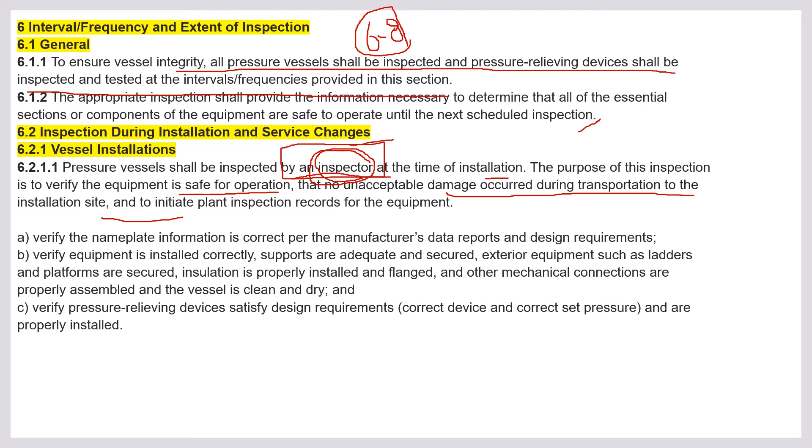The purpose of this inspection is to verify the equipment is safe for operation, that no unacceptable damage occurred during transportation to the installation site, and to initiate the inspection record for the equipment. What else? Verify the nameplate information is correct. Nameplate describes how much pressure, when it was manufactured, what is the code requirement, everything. As per the manufacturer data report and design requirements.

Verify equipment is installed correctly, supports are adequate and secured. Exterior equipment such as ladders and platforms are secured. When I say secured, means it is properly bolted, properly attached. Insulation is properly installed, and other mechanical connections are properly assembled and the vessel is clean and dry. There is no foreign material inside. Verify the PRD satisfies design requirements. Whatever the design requirement is, the PRD was installed accordingly.

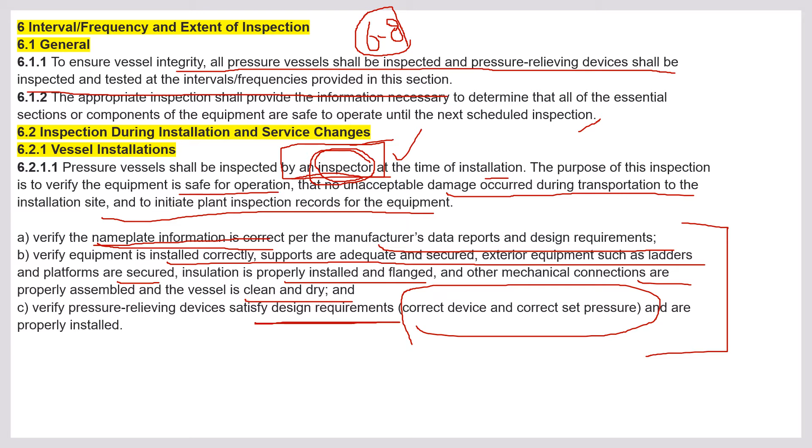Correct device and correct set pressure, that is very important, are properly installed. You will find one question from here. There will be a few options and you have to find out what is the requirement during installation and who will do the inspection. Maybe this is one question and this is another question. As I told you, you have to read API 510 line by line because we can get more than 60 to 65 questions. Some years it is more than 70.

So vessel service change. Service change means the intended purpose it was manufactured for. Now during installation and operation they have changed the service. So if the service is changed, then the inspection also will change. If the service conditions of a vessel are changed, for example process contents, maximum operating pressure, and maximum and minimum operating temperature, the inspection interval shall be established for the new service condition. This is one question.

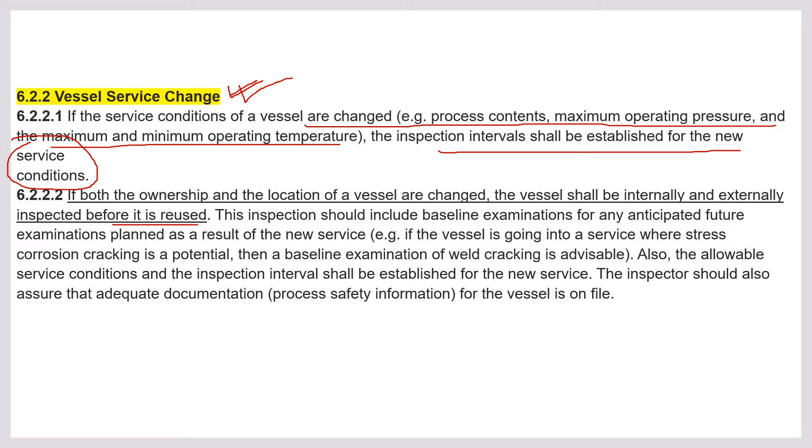If both the ownership and the location of a vessel are changed, the vessel shall be internally and externally inspected before reuse. This is another question you'll find. So one is change of service, another one is both ownership and location changed. If ownership and location are changed, the vessel shall be internally and externally inspected before reuse. If the service is changed, the service conditions need to be evaluated and the internal, external and on-stream inspection need to be changed.

The inspection should include a baseline examination for any anticipated future examination plan as a result of new service. Also, the allowable service conditions and inspection interval shall be established for the new service. If there is a new service, a new inspection plan should be submitted. The inspector should also assure adequate documentation of process safety information for the vessel is on file. A question may come whether we have to include the process safety information or not. That should be included. It can be a closed book question.

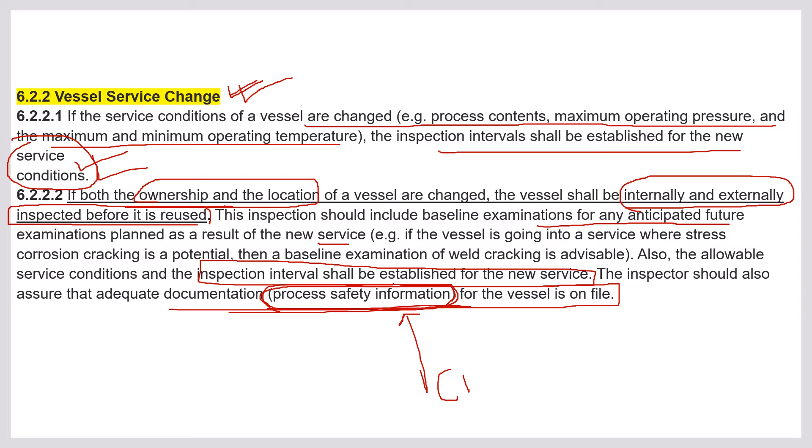So what else? RBI, risk-based inspection. When will we do risk-based inspection? An RBI assessment may be used to establish appropriate inspection intervals for internal, on-stream and external inspections, as well as inspection and testing intervals for PRDs. The RBI assessment may allow previously established inspection intervals to exceed the limits from 6.4 and 6.5. We'll check 6.4 and 6.5.

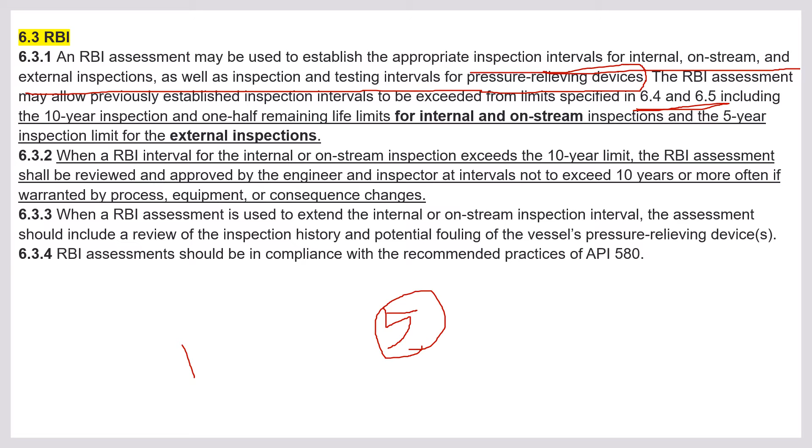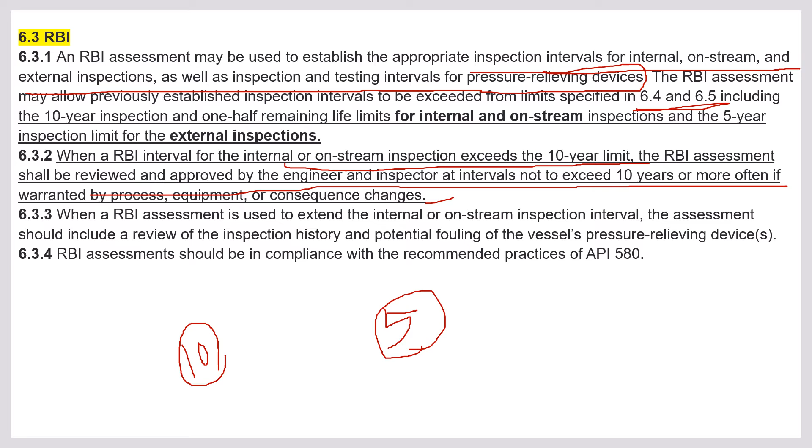When an RBI interval for internal and on-stream inspection exceeds the 10-year limit, the RBI assessment shall be reviewed and approved by the engineer and inspector at intervals not exceeding 10 years, or more often if warranted by process, equipment or consequence changes. So we'll go to 6.4 and 6.5 to make it more clear. External inspection, on-stream and internal inspection, you have to remember it. I highlighted it and made it bold.

Visual external inspection at an interval that does not exceed the lesser, this is the key word, the lesser of 5 years or the required internal or on-stream inspection. So visual external inspection, you have to remember, it is the lesser of 5 years or the required internal or on-stream inspection. External inspection intervals for vessels in non-continuous service are the same as for vessels in continuous service because the external environment does not change during non-continuous service.

Let's say a vessel is not in service and a vessel is in service, there is no change for the external inspection. It is the same because the vessel is outside. For on-stream and internal inspection, that is different. But external inspection is the same because it is outside. So 5 years applies whether it is in service or out of service.

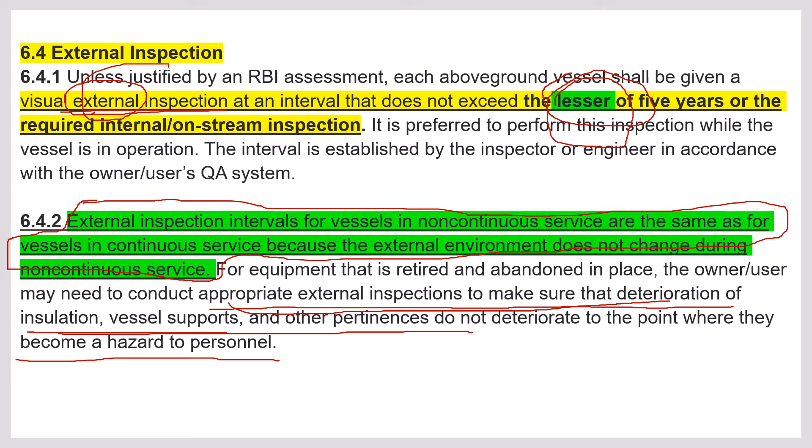For equipment that is retired and abandoned in place, the owner-user may need to conduct appropriate external inspection to make sure of deterioration of insulation, vessel supports, and other appurtenances do not deteriorate to the point where they become a hazard to personnel. So if a vessel is not working at all, the owner can survey the deterioration of insulation, vessel supports, and everything, and make a report on when to do the inspection. This is for retired vessels. Usually they don't ask about retired vessels; most questions come from vessels in service. Now 6.5, where I told you you will get questions: internal, on-stream and thickness measurement inspection.

How will we do it? Unless justified by RBI, the period between internal or on-stream inspection and thickness measurement inspection shall not exceed, this is the key term, shall not exceed one half the remaining life of the vessel. Let's say the life is 20 years. We do the corrosion allowance and we find out after 20 years it should be retired. So what is one half? It is half of 20 years, so it becomes 10 years. Life of the vessel or 10 years.

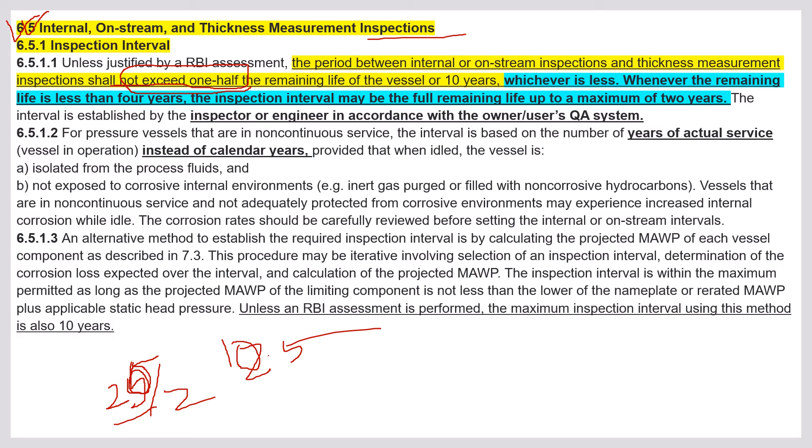Let's say it is 25 years. So 25 by 2 becomes 12.5 years. What does the code say? Not exceed one half of the remaining life of the vessel or 10 years. So here we have to take 10 years. Let's say remaining life is 15 years. Half of 15 years is 7.5 years, so we have to take 7.5 years, not 10 years, because it says the lesser. Whichever is less, that is the main point. We will get an open book question on that one.

Whenever the remaining life is less than 4 years, the inspection interval may be the full remaining life to a maximum of 2 years. That's what it's saying. There is another term. This is up to 10 years. Let's say we get one vessel which is 6 years. So 6 divided by 2, how much is it? 3 years. So what will you do? Life of less than 4 years. Now it is how much? 3 years. Then the inspection interval may be the full remaining life up to maximum 2 years. So that is very clear. You have to calculate the inspection intervals. There is 100% a question you will get from that one.

The interval is established by the inspector or engineer in accordance with the owner-user QA systems. For pressure vessels that are in non-continuous service, the interval is based on the number of years of actual service of the vessel in operation instead of calendar years. The inspection interval may be the full remaining life up to the maximum of 2 years. This you have to remember. You will get one question from here. Why not calendar years, and why actual service?

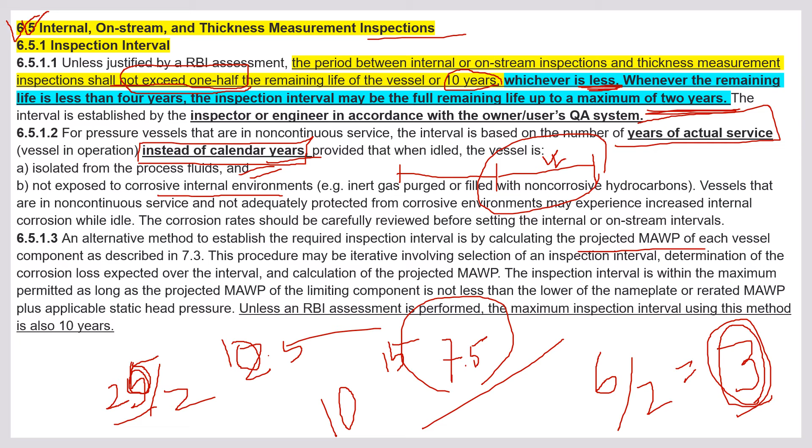An alternate method to establish the required inspection interval is by calculating the projected MAWP. MAWP we will read in 7.3. I will tell you. On-stream inspection in lieu of internal inspection: at the discretion of the inspector, an on-stream inspection may be substituted for the internal inspection in the following situations. When the size or configuration makes vessel entry for internal inspection physically impossible. You will get one question guaranteed. This is a closed book question. Most of the time they will ask this question.

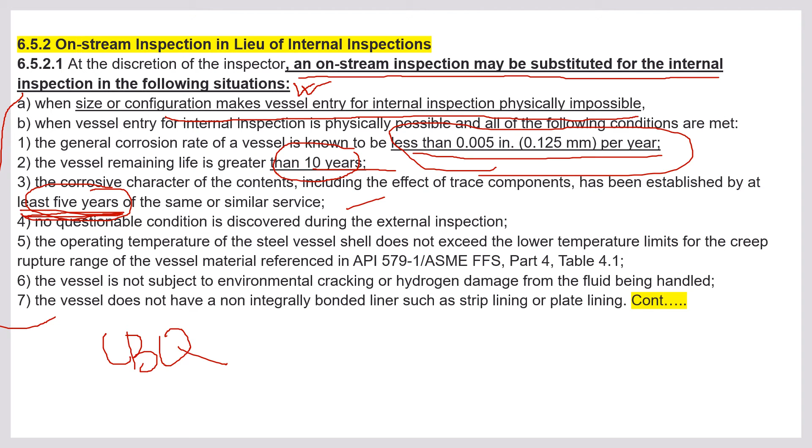The general corrosion rate of the vessel is known to be less than 0.005 inch or 0.125 mm per year. Then this can be substituted. 1 inch is how many mils? 1000 mils. So usually they put it in mils or mm. The vessel remaining life is greater than 10 years, we can substitute. The corrosive character of the contents, including the effect of trace components, has been established for at least 5 years in the same or similar service. These terms you have to remember. Usually you will get one question on one of these points. Next, if the requirements of 6.5.2.1b are not met, the next inspection shall be an internal inspection.

So when a vessel has been internally inspected, the result of that inspection can be used to determine whether an on-stream inspection can be substituted for an internal inspection. If the criteria are met, then it can be substituted. So the following may be applicable when comparing pressure vessels having the same or similar service. This is important. You will get one question: A, B, or C. There is another one on the next slide, where there is a different service.

So when a pressure vessel has been internally inspected, the result of that inspection can be used to determine whether an on-stream inspection can be substituted for internal inspection on another pressure vessel operating within the same service and condition. These are some of the applied methods where similar services are used. When two or more pressure vessels are installed in series and no potentially corrosive contaminants are introduced at an intermediate point in the train or otherwise become present that could potentially affect the vessel integrity.

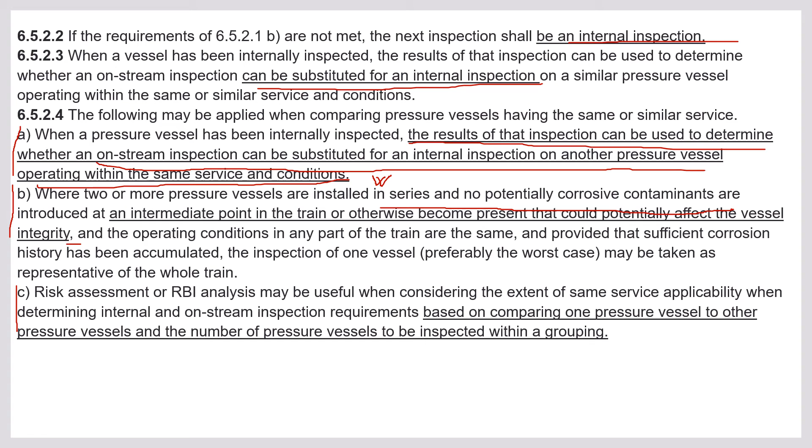With this clause we usually check whether we can substitute some of the inspections, like internal and on-stream. You have to remember this one, and most possibly you will get closed book questions. When an on-stream inspection is conducted, the type and extent of NDE should be specified in the inspection plan. That includes UT thickness measurement, radiography, and other appropriate means of NDE to measure thickness and assess the integrity of the pressure boundary.

Multi-zone vessels. What do you mean by multi-zone vessels? A large vessel with two or more zones of different corrosion rates. It's the same vessel, one vessel only, but the corrosion rate is different. So each zone may be treated independently. We cannot treat the whole vessel in one sequence, and the inspection intervals will change depending upon the severity of the corrosion.

Similarly, like pressure vessels, pressure relieving devices also have a frequency of inspection. What is the frequency for pressure relieving devices? Pressure relieving devices shall be tested and repaired by repair organizations. I already explained in chapter 3 what repair organizations are. You will get a guaranteed question on who is called a repair organization. The pressure relieving devices shall only be repaired by a repair organization qualified and experienced in relief valve maintenance, as per definition 3.1.63.

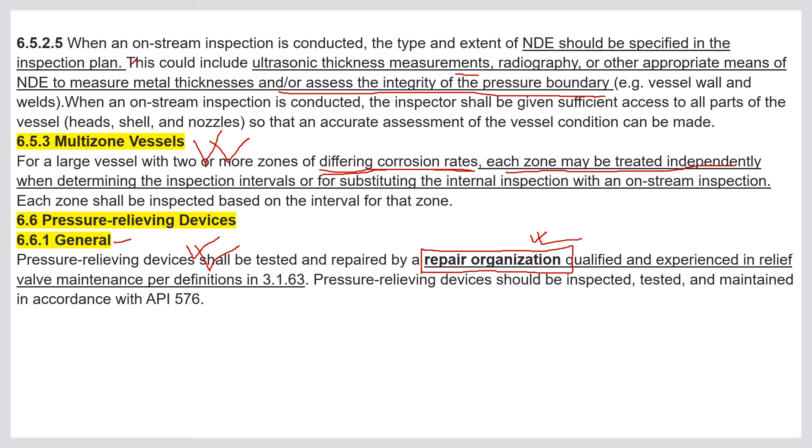Testing and inspection interval for PRDs. PRDs shall be tested and inspected at intervals that are frequent enough to verify that the device performs reliably in the particular service conditions. PRDs are very important because without proper functioning of a PRD, many safety issues can happen. Other pressure relieving devices, for example rupture discs and vacuum breaker valves, shall be inspected at intervals based on the service condition. The inspection interval for a pressure relieving device is determined by either the inspector, engineer, or qualified individual as per the owner/user QA system.

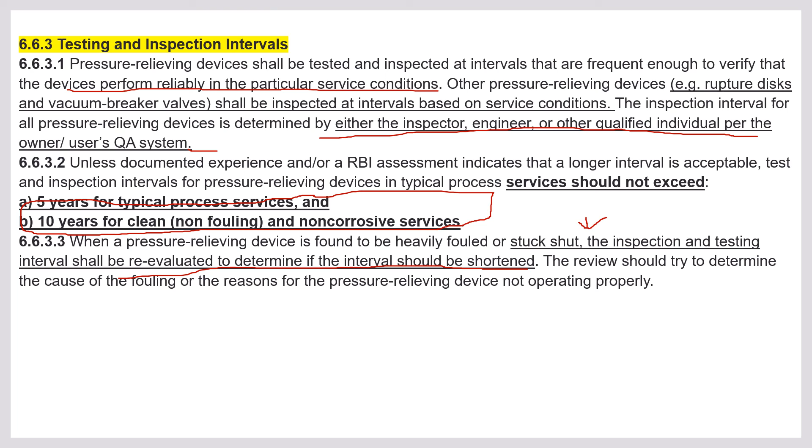Unless documented experience or an RBI assessment indicates that a longer interval is acceptable, test and inspection intervals for PRDs in typical process service should not exceed 5 years, and 10 years for clean, non-fouling and non-corrosive services. This is important. You will get 100% one question. There is another question here. If a pressure relieving device is found to be heavily fouled or stuck shut, the inspection and testing intervals shall be re-evaluated to determine if the intervals should be shortened. We have a few slides after on what criteria we can shorten them.

Deferral of inspections, tests and examinations. Inspections, tests or examinations of pressure vessels and associated pressure relieving devices that cannot be completed by their due date may be deferred for specified periods, subject to the requirements in the following subsections. Here it gives the simplified deferral. You will get one question from here. Usually it is 10% or 6 months, whichever is less. Most exams have these questions. You have to read A to E and remember all these things, and you will get one closed book question. Simplified deferral for PRDs. So that's all. I have explained everything about chapter 6, the inspection intervals for PRDs and pressure vessels.